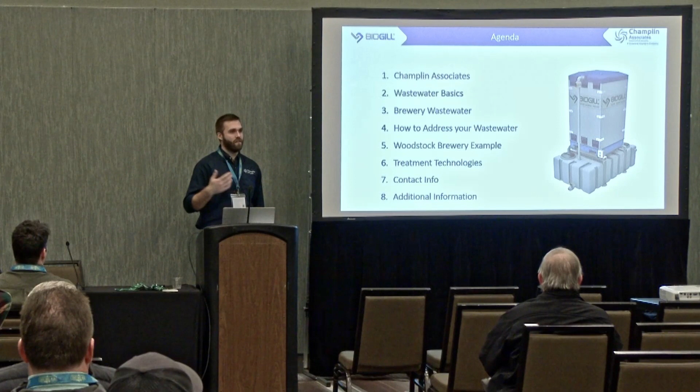So I'm from Champlin Associates. We'll give a little background to them. We're going to talk about wastewater basics, brewery wastewater specifically, how to address your wastewater. We're going to look at some examples of brewery wastewater and how it can escalate to such a big thing. We'll look at some treatment technologies and then contact info, additional stuff.

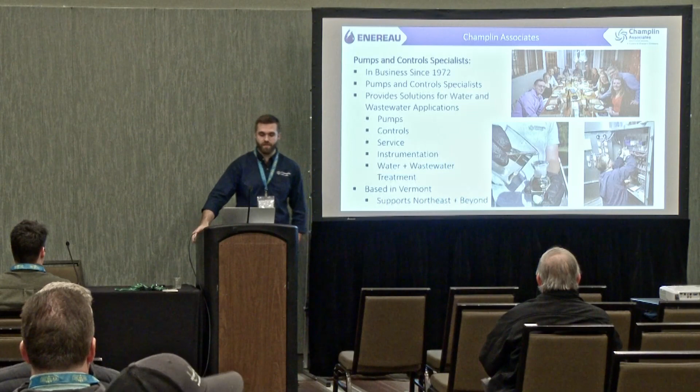So yeah, I'm from Champlin Associates, my name is Alec Disler. We've been in business since '72. We are first and foremost a pumps and controls company, so we do a lot of municipal water and wastewater pumps, controls, instrumentation, all that kind of jazz, which essentially just means we work a lot with towns and cities. We provide solutions for water and wastewater, like I said, pumps, controls, servicing, water and wastewater treatment. We're based in Vermont, but we support all of Northeast plus beyond for treatment. We actually just did a brewery in Arizona, so we're kind of all over the place for treatment side. But our bread and butter is dealing with municipalities, so we kind of understand why they're so upset sometimes about brewery wastewater.

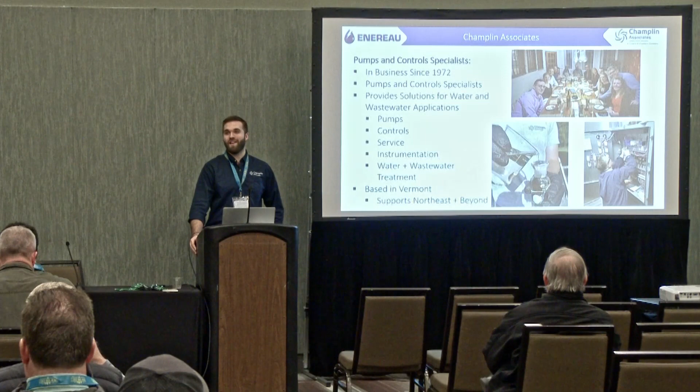So, brewery wastewater, why should you care? Why does the municipality care? Why does the EPA care? Why does anyone care about what's coming out of a brewery? As a brewer, the mindset is it's just organic material coming out of a brewery, it's just yeast and hops. It's not like you're dumping a bunch of arsenic or something down the drain that's going to go and poison the water supply. What's the big deal?

And also, as a brewer, you guys want to brew beer. You don't want to be a wastewater expert at the same time. You got the thing that you love, let's focus on that. This whole other side of the business, that's kind of the icky stuff. We don't want to do it.

So to understand why your wastewater is such a big problem, we need to go over the basics of wastewater itself. So the two main ways that municipalities measure wastewater are flow, which is just a measure of literally how many gallons it is, the hydraulic measurement in gallons per day, the amount of waste we're producing.

And there's also this thing called biochemical oxygen demand, or BOD. BOD is the organic measurement, or how strong your wastewater is. A really good way to think about it is food in the waste stream. It measures the dissolved oxygen needed for microorganisms to break down organic material in your wastewater. So if you think about a municipal plant, what's going on in their waste stream is they have all these microbes that live in the waste stream, and when the BOD comes in, the food comes in, those microorganisms start consuming the BOD, the nutrients, the sugars, carbohydrates, whatever's coming down the drain.

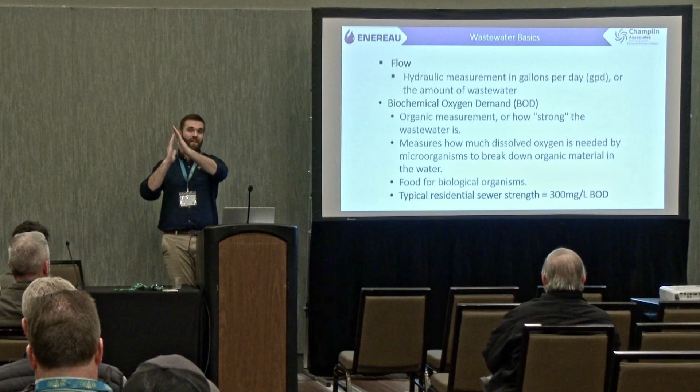At the same time, they're consuming oxygen in the system, and that's kind of the measurement of BOD, how much oxygen is consumed when that food comes in. What can happen is if there's too much food coming in, that population can skyrocket, and then they're not able to get enough oxygen into their system. Those microorganisms will hit this maximum threshold, they'll consume all the oxygen in the system at one time, they'll all suffocate and die, killing the entire plant. So then they have to go and scoop up sludge from another plant and reseed theirs. It's a whole process, and it's very expensive, and it's not a good situation.

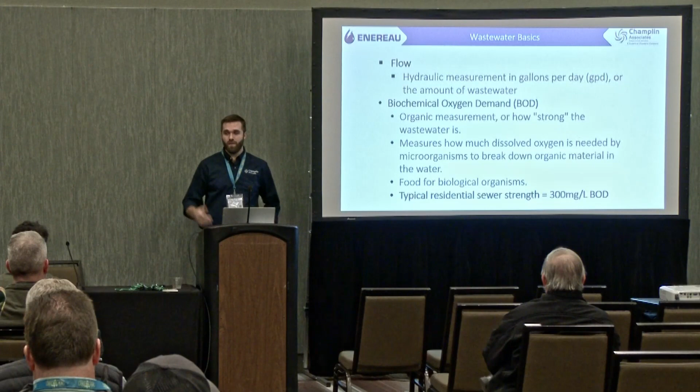But for BOD, the number that you should keep in your mind, and it's a very important number, is 300. So 300 milligrams per liter is typically recognized as residential strength sewer.

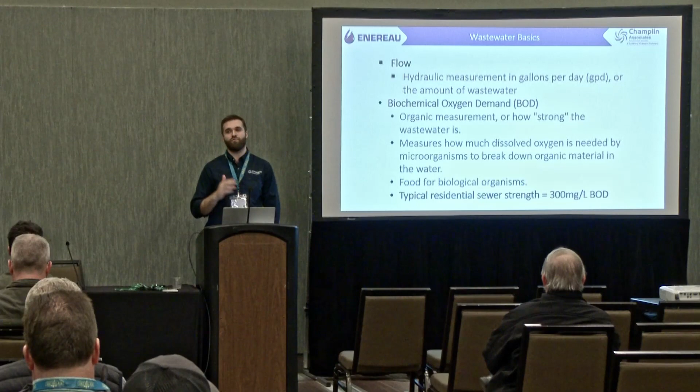Wastewater treatment plants have a design capacity both for flow and BOD, typically measured in BOD pounds per day. Here's some quick math to figure out your pounds of BOD: millions of gallons per day times the BOD loading times 8.34. That 8.34 is just the weight of water, and that gives you your pounds of BOD a day.

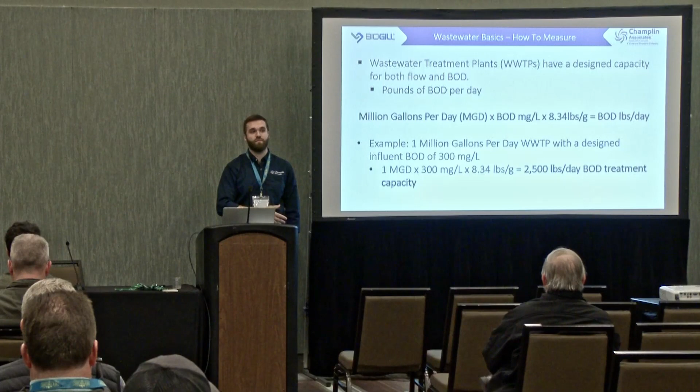For example, let's say your town has a 1 million gallon per day treatment plant. They're probably designed for 300 milligrams per liter per day at average residential strength. Times that by 8.34 gives you 2,500 pounds of BOD treatment per day. That's the capacity of that treatment plant.

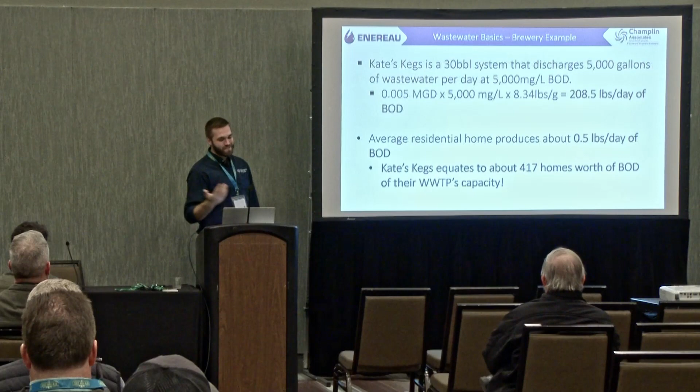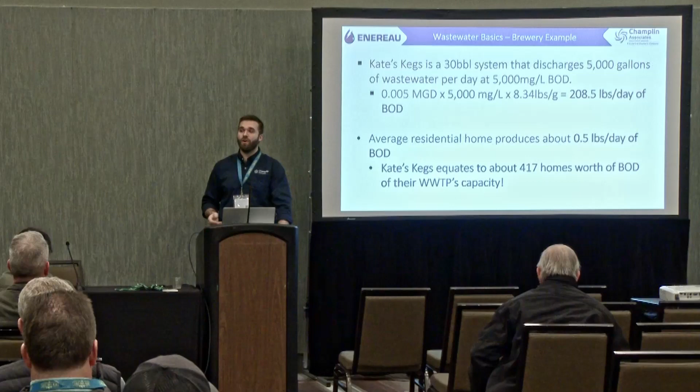As an example, Kate's Kegs is a 30-barrel brew house. They discharge about 5,000 gallons a day of wastewater at an average BOD of 5,000. So we take 5,000 gallons in millions of gallons per day, that's 0.005, times 5,000, times 8.34, gives us 208.5 pounds of BOD a day coming out of that brewery. An average residential home produces half a pound of BOD a day, so that means Kate's Kegs equals 417 homes worth of BOD capacity to that wastewater treatment plant.

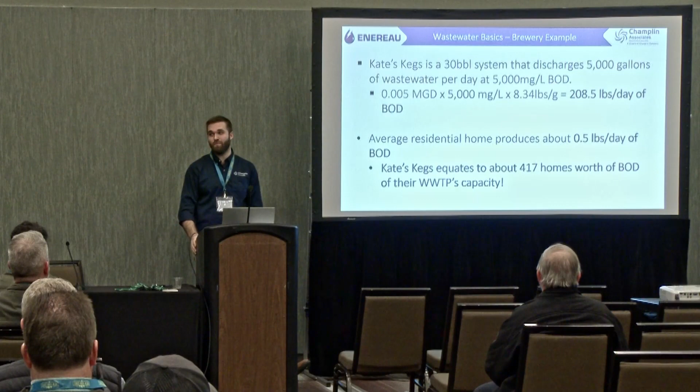As we saw, a 5,000 barrel brew house, if you have even worse process control, can be up to 500 homes worth of capacity at the plant. Same with TSS, total suspended solids, which we'll get into a little later. But your brewery could easily equal 75 homes plus worth of capacity at your treatment plant.

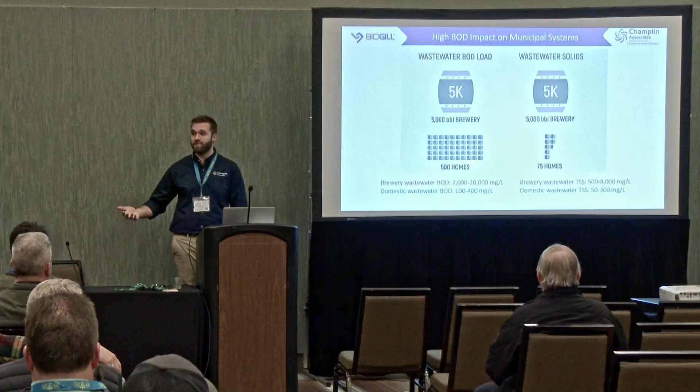So now we kind of see how much of an impact a brewery can have. Let's see what's the average brewery, what's going to be coming out of your facility. Typically, 4 to 6 gallons of wastewater are generated per gallon of beer produced.

If you have really great process control, checking your numbers, making sure you don't have extra spills and that kind of stuff, you could be down between 2 to 4 gallons of wastewater per gallon of beer. If you're not doing anything, letting the water flow, you could be upwards of 7 to even over 15 gallons of wastewater produced per gallon of beer produced. On average, you're probably somewhere between 4 to 6 if you're doing any type of process control.

On the flip side, BOD, or biological oxygen demand, typical brewery process water can average somewhere between 3,000 to 7,000 milligrams per liter of BOD. If you have really great process control, side streaming a lot of your solids, taking out the really high strength liquids, making sure you don't have any spilled beer, you could be somewhere between 2,500 to 3,500 milligrams per liter.

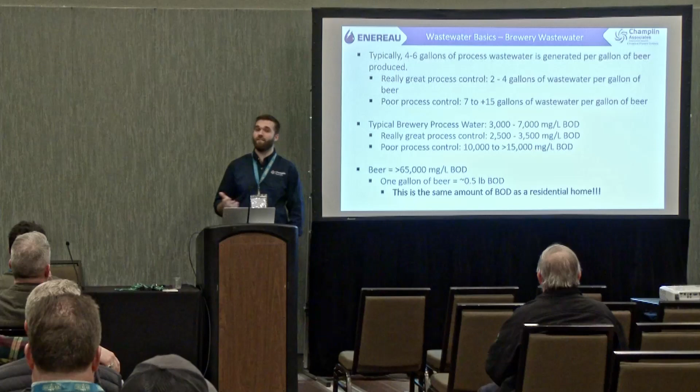If you're not doing anything, putting all your solids down the drain, your spent grains and everything, you're probably upwards of 10 to 15,000 milligrams per liter of BOD on average.

Another interesting note: beer itself, if you just dump it down the drain, is probably about 65,000 milligrams per liter of BOD, which means 1 gallon of beer equals half a pound of BOD, the same loading as a residential home. So if something goes wrong and you've got a batch of bad beer, don't open the floodgates and dump it down, because you're going to overload something.

Other things about brewery wastewater: your pH is probably going to vary somewhere between 3 to 10, some pretty wide swings coming out of your facility. Beer itself is pretty acidic, so you're probably going to hang out in the 3 to 5.5-ish range just from the beer, but you're also going to use some more basic chemicals. Often, pH is one of the first things your municipality looks for to have regulated before it hits them.

They don't want these crazy swings in pH, and they also don't want consistent acidic stuff going through their pipes. So that might be the first thing your town asks you to do: give us a neutral pH, and then maybe we'll add some more requirements later.

Another thing your town might do off the bat is look at your TSS, or total suspended solids. All that means is the chunks in your brewery wastewater. If it's dissolved, it can't be a TSS, but your spent grains, your trub, your yeast, your hop residue, all that kind of stuff will add up to your TSS.

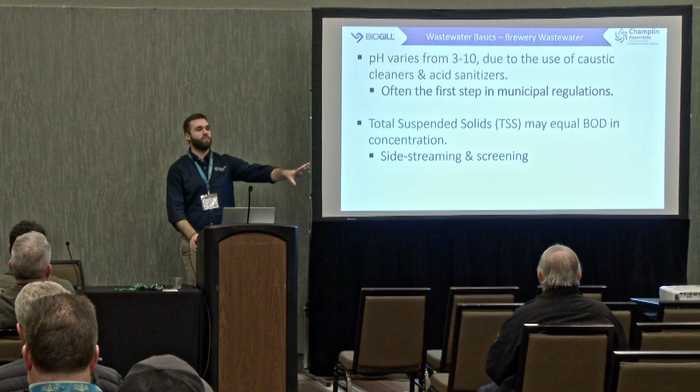Often, municipalities will say, okay, make sure you give us a neutral pH and don't put anything down the drain that's bigger than half an inch or so. And that would involve some pH adjustment equipment and some screening to make sure you're not putting additional chunks down the drain.

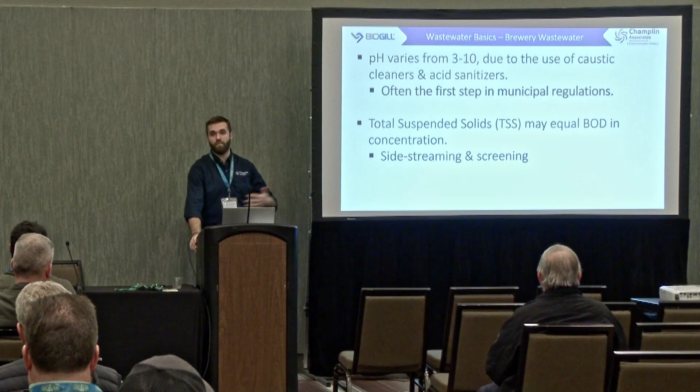So we kind of saw the problem a little bit from the brewery side. What's the municipality? How do they respond to brewers in particular?

Unfortunately, one of the main things we see from them is this tax them into submission mentality. You say, hey, they're having a big impact on our plant, they should pay for that impact. So we're going to jump down their throat, charge them a ton of money. We've seen people charge upwards of $10,000 a month just for being able to discharge to their municipal plant. It could be more, it could be less, but it's often a growing response we're seeing from town to town, trying to recoup some of the money the brewer has impacted them with.

Those taxes typically come from surcharge fees. We say a high strength surcharge fee, typically based on pounds of BOD being sent to the plant. That's the best way to do it. Unfortunately, a lot of towns just give a flat milligram per liter amount. They might say, hey, anything over 300 milligrams per liter, we're going to surcharge you on.

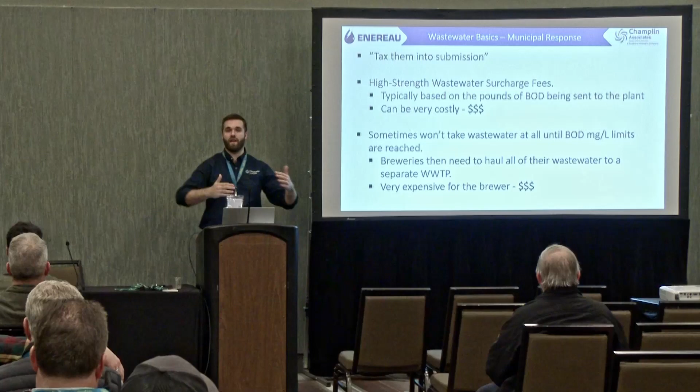Some of your towns might be a little less than that, might be a little more, depending on the municipality. So you have to talk to them and say, what's my discharge limit? Am I at 250? Am I at 600? What can I do? A lot of times they'll say, here's a flat amount, and if you go over that, we're charging you. Obviously, that can be super expensive.

Sometimes we see that municipalities won't even take a drop from your plant if it's over a certain milligrams per liter threshold. If it's over 300 milligrams per liter, we don't want it. Take it somewhere else, do something else with it. We're not taking it from your facility.

That often causes you guys to put a big storage tank in the ground, call up the local pumper company. They're going to suck it up, haul it, and drive it to whatever municipality is going to take that waste. And that municipality is probably going to put a surcharge on you as well for taking the brewery waste. So obviously that's going to be super expensive.

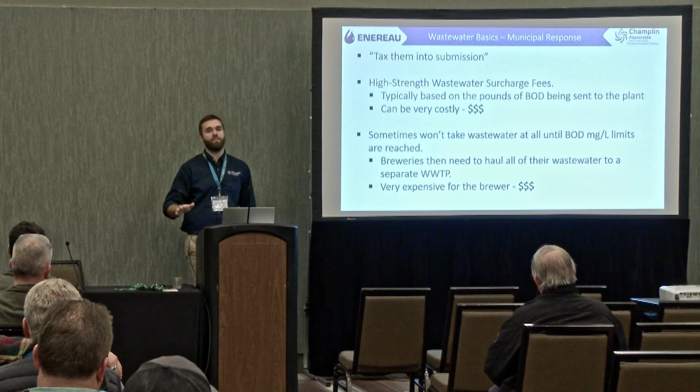We're dealing with a brewery in Vermont right now - I'm based out of Vermont. They're on municipal sewer, and their plant has hydraulic capacity, they can take the actual water from them, but they won't because it's so high strength. So they're currently having to divert all their waste to a separate holding tank, and then they have a pumper company come, I think at least twice a week for them. They're fairly small, but twice a week, bringing it to a different plant. So they're paying out the wazoo for that.

So unfortunately, that's a typical response from the municipality. So now what? We got a lot of bad news so far. I'm sure you guys are asking, great, I know there's a problem, and I know the municipality is going to crack down on me, or at least they're thinking about it and might come in the future. What do I do? How do I combat that? And that's a great question to have.

So number one is to understand your waste stream. That's to build some type of portfolio, try to understand what's actually coming in and going out of your facility. We'll go into that a little more in a minute.

Number two is side streaming. Everyone should be doing some type of side streaming at their facility. It doesn't matter if you're a dude in your garage or you're a 100,000 barrel a year system, everyone should be side streaming something, at least your spent grains, getting those out of the waste stream. Side streaming is simply the removal of high strength solids and waste from the waste stream - a separation, collection, removal of the solids, liquids, maybe some first rinses if you're trying to knock down your BOD some more as well.

Typically, what can happen is the brewery will team up with a local farmer. Pigs love spent grains, so farmers love getting free feed if they can.

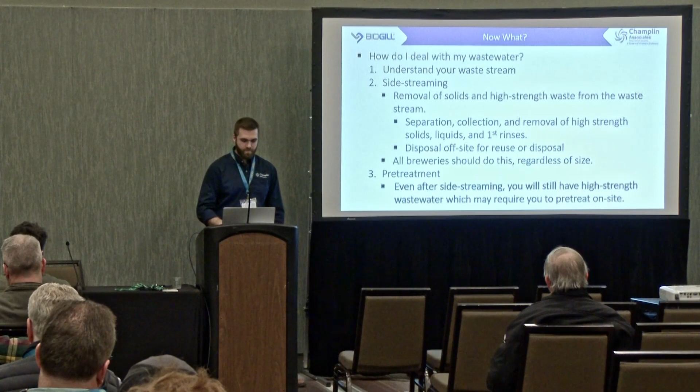So, understanding your wastewater. Start by doing a deep dive analysis of your operations. Build a water and wastewater profile - that's looking at your gallons per day coming into your facility and coming out of your facility. A lot of your stuff's going to leave as beer, but you're still going to produce quite a bit of wastewater. Look at that water to beer ratio and see if you can figure out what you're doing there.

If you guys are hanging in that 7+ range, it might be time to take a look at your operations and see where we can scale back on our water use. If you're somewhere between 3 to 5, you're doing pretty good. You're not the best in the world, but you're doing much better than traditional people who are just dumping everything.

Take some samples of your BOD, your TSS, your pH, etc. There's local testing facilities - this is the one right here in Albany. Adirondack Environmental does wastewater testing. So if you guys want to start building a profile, you can ship some samples off to them.

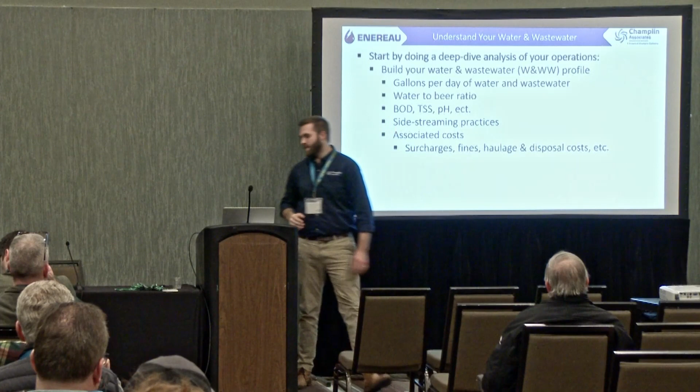If you are doing sampling, one thing I suggest is to not do what we call a grab sample. A grab sample is walking over to your tank, taking a scoop, and saying, okay, that's an accurate representation of my wastewater. Instead, if you can do something called composite sampling, that's much better. Composite sampling is taking periodic grabs, periodic sips of your wastewater over 24 or 48 hours, and that will give you a more complete profile of what your waste stream is on average.

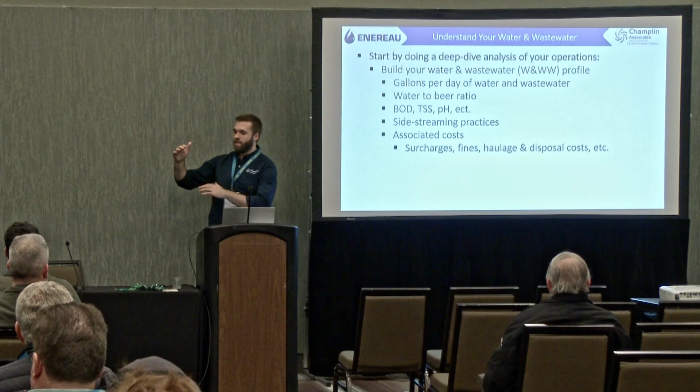The best composite samplers, in my opinion, are ones that are flow-based. So every 150 gallons or whatever coming out of your facility, it'll take a small sip and put it into a jar, and then after 24 hours you have X amount of water, and you can go see what you actually have over time.

The reason I like flow-based versus just guessing on a time basis is because you'll get a more accurate representation. If you go by time, this hour you might be dumping a ton of waste, but the next hour you might just be flushing toilets. So if you go just on time, you're probably going to miss that larger chunk of waste and get a little less accurate reading. Anyway, that's my rant about if you're going to do sampling.

Anyway, that's my rant - look at your side stream processes. You mentioned composite sampling, not to do it by time. Yeah, if you can, I would do it by flow. So you can put a flow meter and say, okay, every 100 gallons, we're going to take a small sip out of this waste stream, rather than once an hour we're going to take a sip. I think that's a little bit more accurate representation.

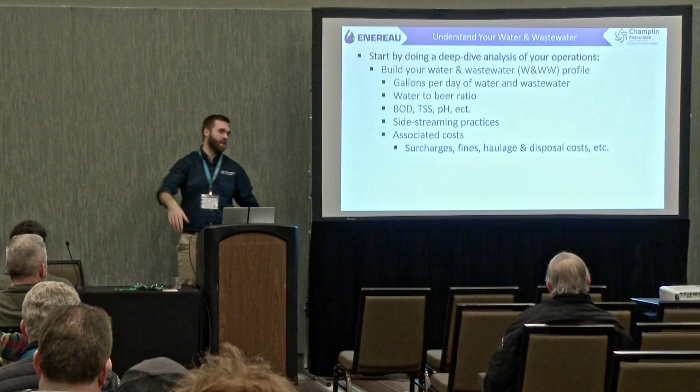But if you let it sit in a jar for 24, 36, or 72 hours, that's not a big issue. It does take 5 days for them to do the test, test it, wait 5 days to see how much oxygen was consumed, then test it again. So unfortunately, you cannot do instantaneous BOD testing.

Some things you can test right on site, like pH and TSS. What you can do is COD testing, chemical oxygen demand, which you can test instantaneously. If you want more in-house testing to understand your place, I'd suggest doing an instantaneous COD test, sending off that same sample at the same time for BOD testing. When it comes back, you can do a correlation, and after doing that a number of times, you'll have a correlation between COD and BOD for your own in-house use.

We did that for 9 months and got zero correlation. Oh well, that is unfortunate. Yeah, it didn't work.

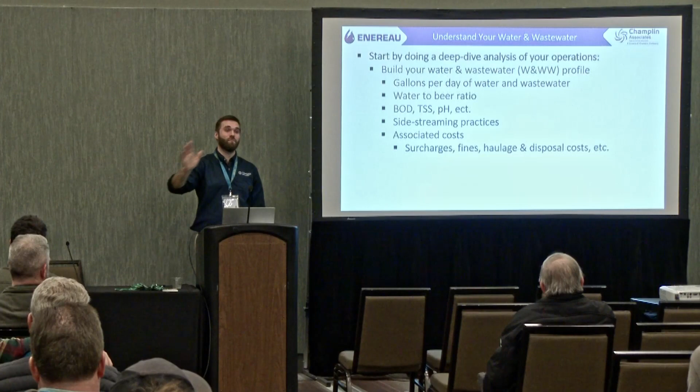Okay, well then stick with whatever the lab says. And on that topic, whatever you do in-house isn't going to count for what the municipality says your stuff is. That's a great process control for your own mind, but the town's not going to say, oh yeah, whatever you said is totally fine. They're going to want to do their own testing or get it approved by a lab.

Any other questions? Okay, cool. Do some associated costs with that - if you're getting surcharged, doing hauling fees, labor to side stream all this stuff. If you can do a cost breakdown, you can see what your waste stream is actually costing you, and how long it would take for ROI on a system.

So again, looking at your facility, 10% of the waste coming out is actually from the brewing process, while 90% is coming from the cleaning itself - rinsing your fermenters and all that kind of stuff is where most of your waste comes from.

Segregate whatever comes down the drain - same kind of idea. If you can recover it, see if you can use it somewhere else, give it to pigs, put it in compost, something like that.

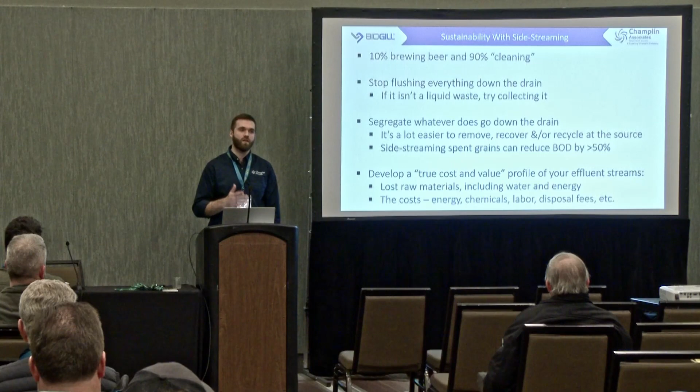If you're not doing side streaming right now and you start, you'll see a reduction of BOD over 50%. Most of you are probably already getting your solids, so even with intensive side streaming you won't get that dramatic a reduction from where you are currently, but it's still good practice and you should still do it.

Like I said, develop a true cost and value - how much is all your stuff costing you? Raw materials, water, energy, chemical usage, labor, all that jazz.

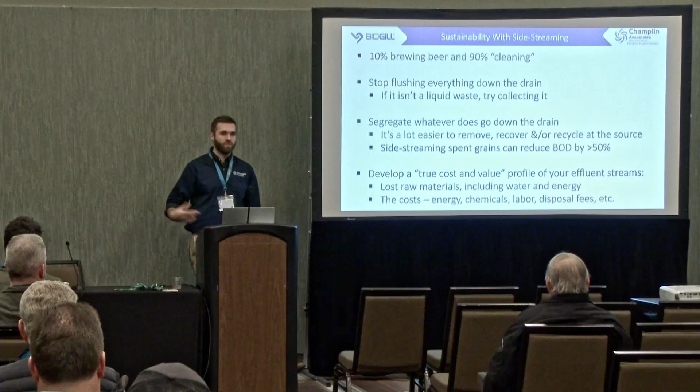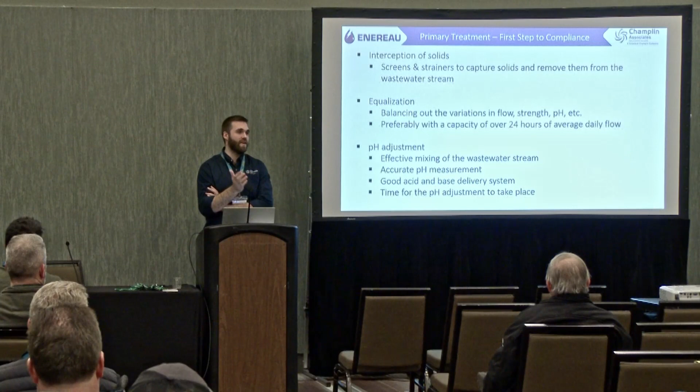So primary treatment, the first steps. The first step, as I mentioned, is looking at that TSS - the interception of solids. That means screening and filtration, so put some screens and strainers to capture those solids and remove them from your waste stream.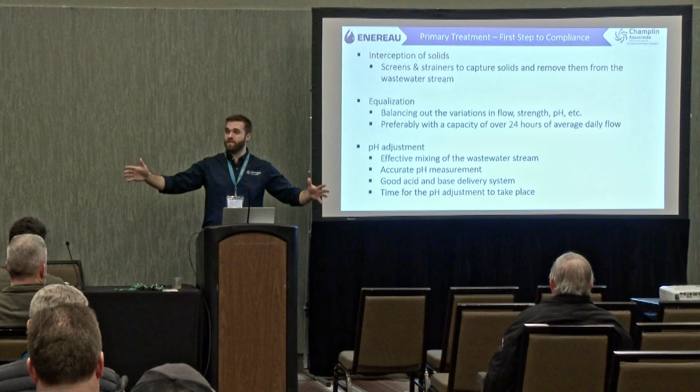The next step would probably be equalization. All equalization is, is a tank that gives your waste time to equalize with itself. That will help with your pH, because dropping beer is acidic, and cleaning your tanks is basic.

You're going to be cleaning your tanks, that's going to be basic. It should help neutralize your waste stream already, so you're not hitting the town with a 10 pH one day and 3 pH the next. It should equalize to maybe a more steady average of 5 or so. That will also help with strength, because one day you're flushing toilets, the next you're brewing beer, so equalization helps even that out too.

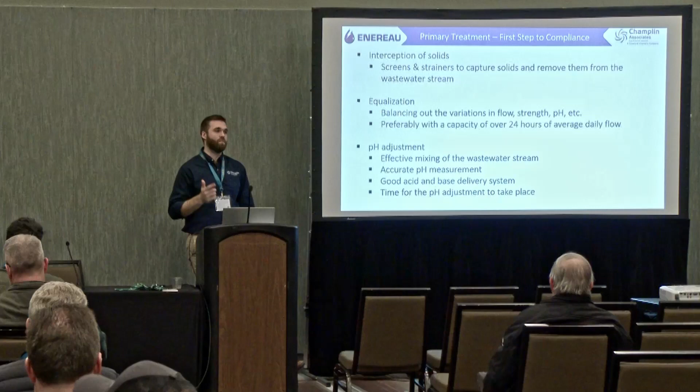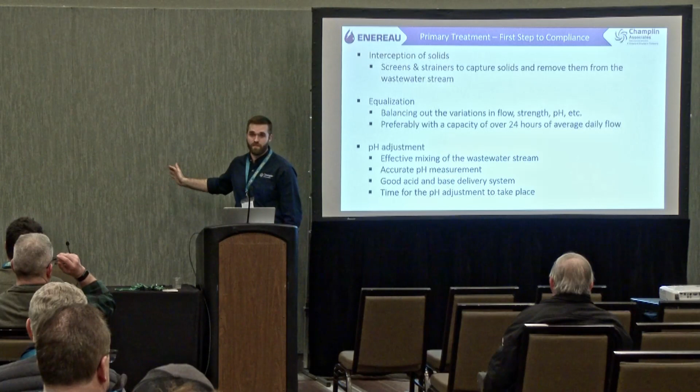It helps with flow too, because what can really mess up your town system or on-site leach field is surges coming out of the brewery. If you dump a fermenter, that's a lot of waste at one time, really impacting the system. But if it's more of a steady stream trickling in, it won't upset the system as much as a big hit all at once. So equalization helps with that too - we recommend 24 hours worth of storage if you're able to do it.

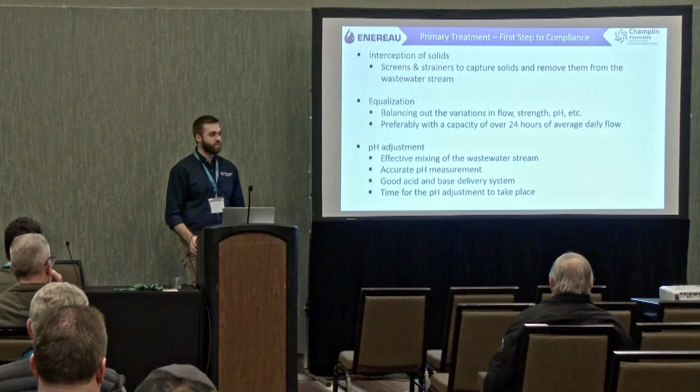pH adjustment will happen in the equalization tank. We could do inline pH adjustments, but that's a little trickier to make sure you actually know what's coming out of your facility. Try to get some accurate pH stuff on there, because that might be one of the first things your municipality really cares about.

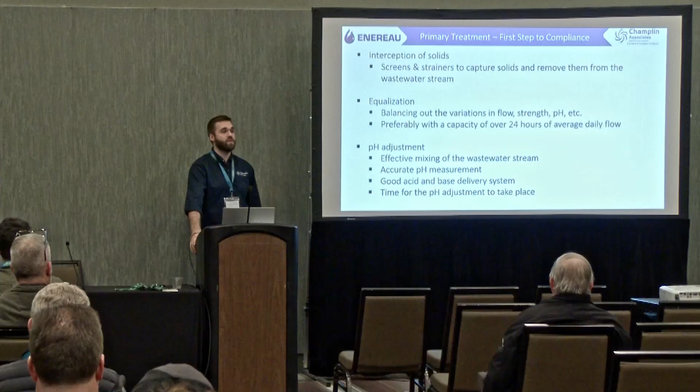They started off as a 7-barrel brew house. They were cranking out the beer, so they upgraded to a 30-barrel brew house. Within about a day or so, they overloaded their municipal system and totally killed it.

All the waste coming out of the facility went to the plant. The bugs and microbes in the plant skyrocketed, they all suffocated and died, killing the plant. Now that plant has to go scoop up new activated sludge, healthy sludge from another plant, drive back over, reseed the place, and give it time to repopulate.

Woodstock ended up getting fines upwards of $10,000 a month until they were able to complete some type of treatment system to knock it down from their thousands of BODs coming out to below 300 milligrams per liter.

Unfortunately, all that happened was those tanks went septic, and now you're aerating septic tanks, so the whole place smells like dookie, and the whole town smells terrible. Talking to the brewers, they said they smell it a couple miles out from town on their way to work.

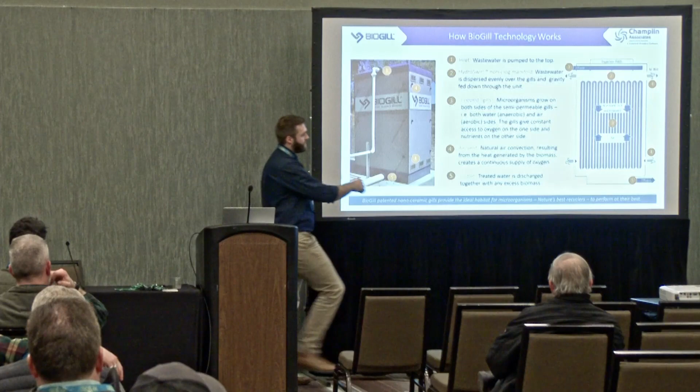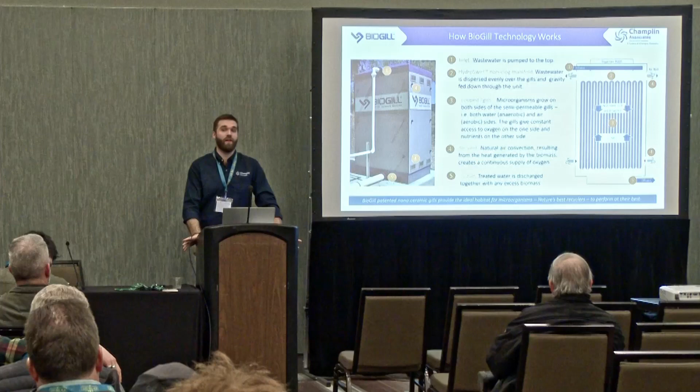The way BioGill works is, inside of this tower lives what they call gills - they kind of look like window curtains. It's essentially a terrarium for the microorganisms that would be in the treatment plant, letting them live in a highly condensed area inside the tower itself.

It continually recirculates and trickles water over top of these gills, pumping from the recirc tank underneath - you can see this black tank here. There's a small pump that continually recircs over the top of that tower, which has a very large biomass, as we call it, just a chunk of bugs living in there.

And that continually recirculates and trickles down, and that biomass eats up the nutrients, eats up the BOD in that waste stream before it goes to the town.

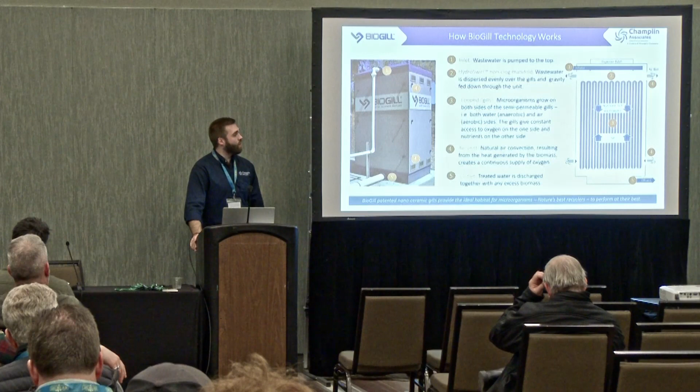What we care about with the Biogill system is the pH, so we do pH adjustment right in the first tank, because the microorganisms want to be somewhere in that happy 6 to 8 range to make sure they stay alive.

And we care about the flow, so say we're producing 4,000 gallons a day. We'll equalize that over time, so let's see if we can trickle it in over 24 hours and let this thing work 24 hours long. That's why we want 2 days worth of storage, so the system can continually feed itself all day and all night, rather than just in batches. It helps with the recirc time in the tanks themselves.

With the microorganisms, what they care about, same as in a municipal plant, is the food coming in, the BOD, and the air. They need oxygen to survive.

So the way that Biogill gets around the air problem - typically at municipal plants, they put in these really big blowers and try to pump air into these lagoons, which isn't a really efficient way to get air into water, but it's the way we currently have. Biogill is able to bypass this through natural convection.

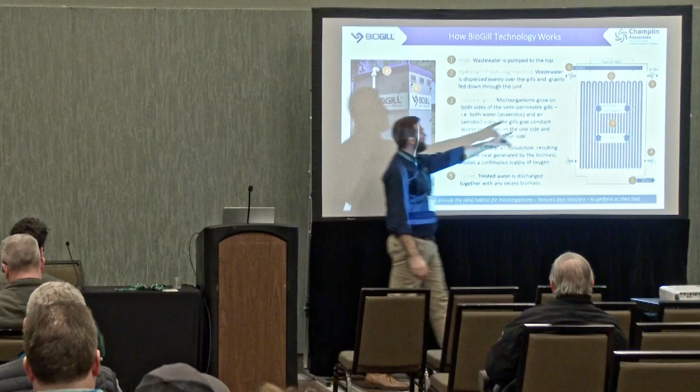So those microorganisms break down nutrients, and in that breakdown process they generate heat. So it's going to pull cold air from the bottom and discharge hot air from the top. That's a really efficient way to get air into the system without needing excessive blowers, which means you can save energy costs with that.

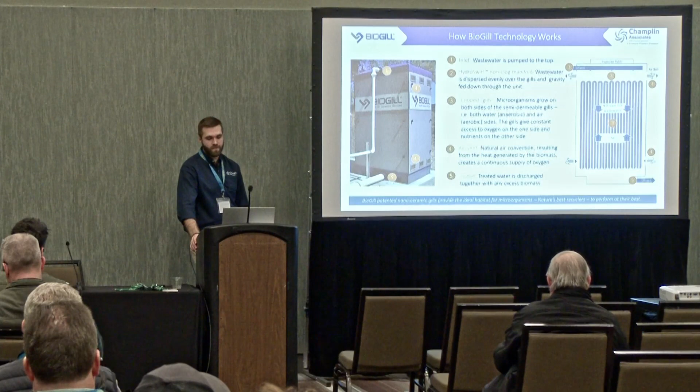Biogill is modular as well, so let's say you're in your barn right now brewing, and say okay, I'm going to be here for a year. Next year I'm planning on going to a warehouse, and I'll go from there. I'm producing 1,000 barrels this year, next year I want to produce 5,000, and keep going. This type of wastewater system can grow with your facility.

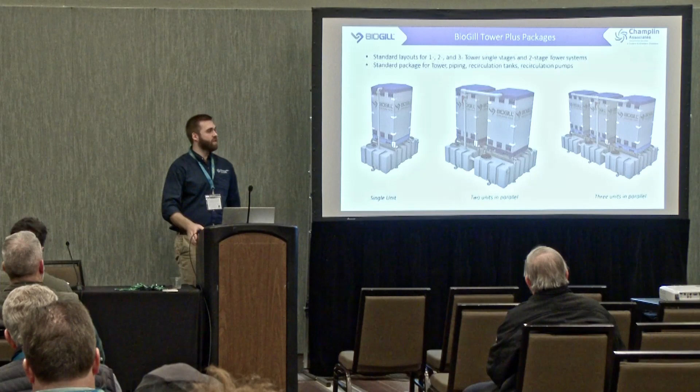So you can start with one tower, and say, hey, I doubled in size, now I need to double my treatment capacity, so add another tower. It can grow with you, and you can spread out those costs over time rather than building something for a fixed size - if it's not your size, it's going to either starve or overload. Having something modular is really helpful.

Another technology that's out there is called Enereau. It's an MBR, a membrane bioreactor. James Hotchkiss is actually here - if you want to get really technical on this stuff, James can help you out. They're upstairs as well, and he can talk about it much clearer than I can.

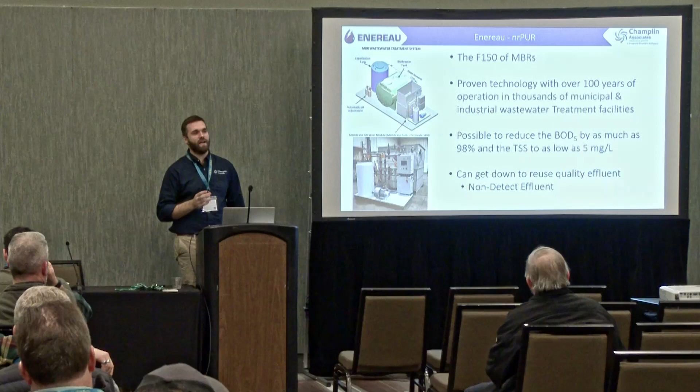We like to call the Enereau system the F-150 of MBRs. MBRs, for those who aren't familiar, are a proven technology - they've been around for a while and are in thousands of wastewater treatment facilities. But oftentimes they can be Ferraris - very expensive, with all the bells and whistles, stuff that the average person just doesn't need or really care about.

Enereau, on the other hand, has been able to simplify the technology and high treatment capacity of an MBR into something anyone can run. They have stuff in the Caribbean where, correct me if I'm wrong, essentially you send all the equipment there, teach a local operator over Skype how to put it together and run it, and they can run it themselves without really any prior training.

So we really like Enereau as well, because just like Biogill, it is modular, so you can start with a smaller system, and as you grow, you can add more units to it.

A really cool thing about Enereau is that it can get down to reuse quality effluent. That means you can treat your waste to where, if you want to reuse it back in your beer, we'd have to do a couple extra steps probably, but we can get all the way down to at least gray water, where you can reuse your wastewater back in your facility for toilets or whatever pretty easily. We're looking at stuff like in Arizona possibly for reuse quality, where they can put it back onto golf courses and things like that. So if you're looking for something like that, Enereau is a great option for you.

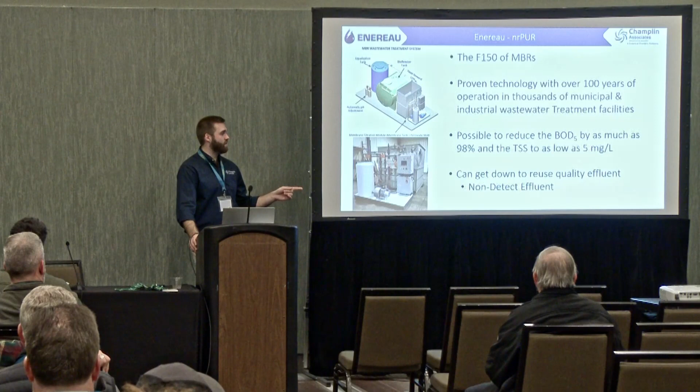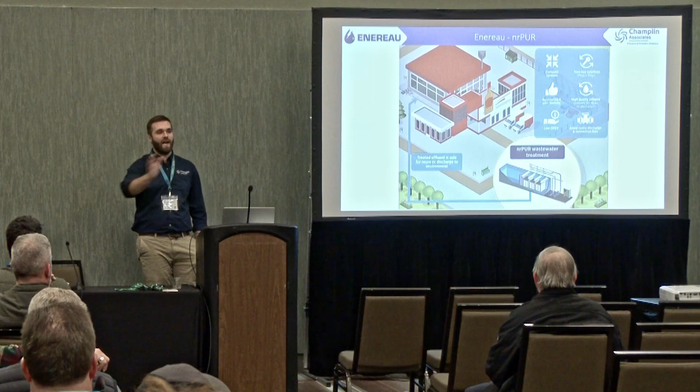Both of these are fairly comparable in price, but if you want to get down to reuse quality, Enereau is the way to go, 100%. Just a quick diagram: it's compact, both of these are kind of turnkey solutions. They're very automated, user-friendly. We try to make our systems as operator-friendly as possible because we want you guys to be able to brew your beer and not have to worry about wastewater. Unlike something like an anaerobic digester, one of those big things, you're going to have to hire staff full-time to run stuff like that. We're trying to get away from that so you can still brew beer and manage your wastewater system at the same time, quite simply.

So, in summary, brewery wastewater, it's no joke. You should understand your process, understand what's coming out of your facility, especially if you meet your numbers before your municipality or EPA jumps down your throat and says, hey, we've already done our testing, you're already kind of looking at this. That's something I'd really strongly recommend: have a plan in place now before someone jumps down your throat on stuff. Because if they come and say, hey, you're killing our waste plant, we're going to charge you a ton of money, you can say, okay, we've already been thinking about that, here's our plan, even if you're not really planning a plan. But here's our plan, and it's like, okay, they've been thinking about it, they have a plan in place, let's not kill them right now, we'll give them a year or two to figure this thing out in the meantime. So that's a really helpful way to calm the fear or aggression that can come from municipality crackdowns.

Like I said, municipalities are cracking down on breweries all over the place. Unfortunately, breweries are just an easy target for them. You guys pop into towns, and towns are really excited to have you, but they don't understand the impact that's going to happen on their treatment plant, so they overreact the other way.

Side stream—if you're not doing it now, please start doing it. That's the number one way to knock down your BOD, your TSS, all these numbers pretty easily. And the least expensive option of everything is the side stream stuff right now. If good housekeeping is not enough, if the side stream is not enough, then look into a pre-treatment system, because you can only get so far with that side streaming.

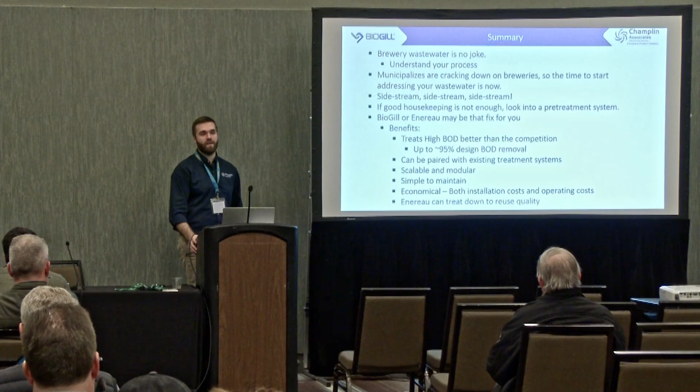They're both simple to maintain, so anyone should be able to do it, whether you have any background in wastewater or not. Economical—they're some of the cheapest stuff on the market right now. All of it is an investment, nothing's free, but for the stuff that's out there, it's one of the most cost-friendly options available. And if you're looking to get your waste all the way down to reuse quality effluent, Enereau is probably the way to go. But yeah, that is my presentation. Kind of breezed through that. So if you guys have any questions, let them rip.

Happy to answer. Yeah, we have a big issue getting rid of spent hops. Yep, so we're side streaming it and then getting it hauled off-site. We'd love to take the hop sludge to a solid, get rid of it in solid form. Do you have any recommendations for that?

Yeah, you're going to be looking at some screening options for that. For both Enereau and BioGrill, before those, you're going to want to put some type of screening system anyway. The tighter the screen, the more residue you're going to collect versus water. So options could be a rotary drum screen, a static screen, or bag filters, but those can get clogged easily if it's taking up a big chunk. Those are probably my first 3 to look at: rotary, static, and bag.

Just to add on to that, are you already able to separate it from everything else? Yeah, we're able to separate it for the most part, and it goes into a big storage tank. As long as it doesn't have yeast in it, you can feed it to cows—the hops of it, actually. Have you tried that? Cows don't like it that much. I guess it depends on how much.